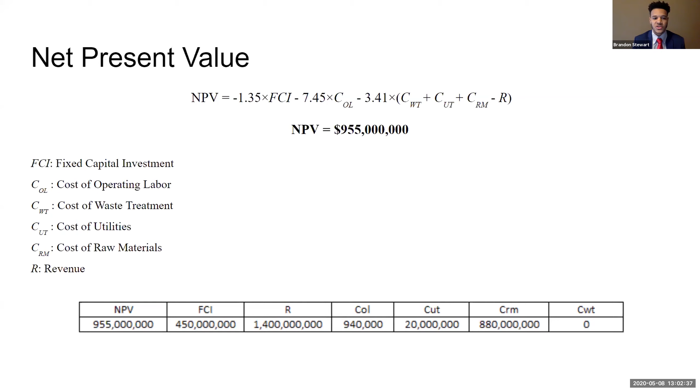Another key takeaway here is the fact that we were unable to have a VGO recycle. The reason why is because this had a negative effect on our kinetics. So instead, we're just selling that at a reduced price instead.

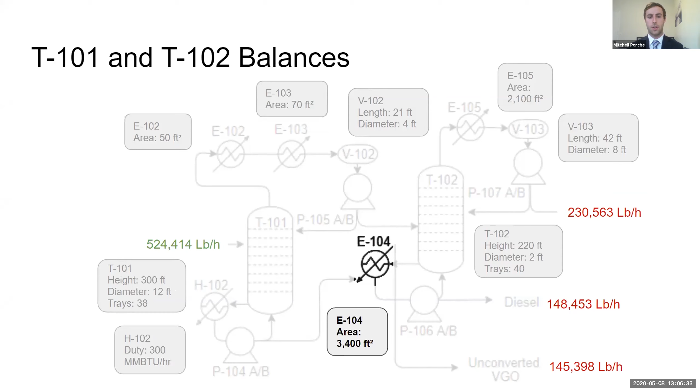It's important to note that in the literature, the reactor was held at a pressure of 2200 PSI, so we also applied this to our reactor. After reactor optimization, we determined that the optimal temperature and residence time for our kinetics were 824 degrees Fahrenheit and an LHSV of 0.9 hours, about 55 minutes.

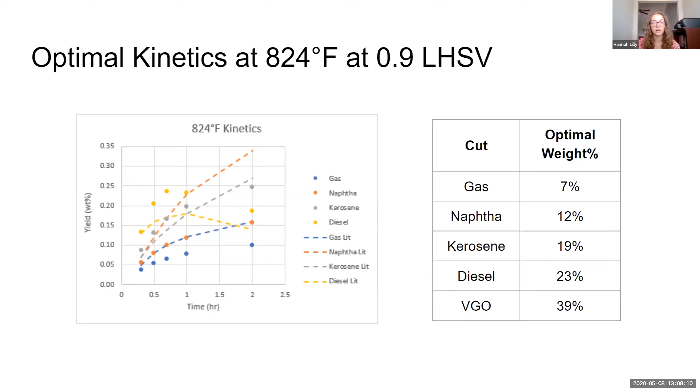Like Mitchell mentioned earlier, we're not able to recycle our VGO due to the negative effect that it had on our kinetics, so that will be sold, which we'll discuss later.

So now we'll talk about the optimizations performed with our system. Our first optimization is the reactor optimization. The reactor optimization had the biggest impact on the net present value.

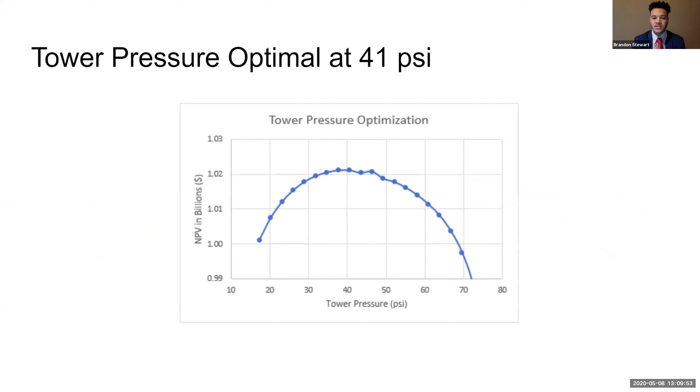We did not optimize tower 102 due to the fact of lack of convergence, and as a result of the lack of net present value effect, we thought that we could just move forward with our simulation without optimizing that one.

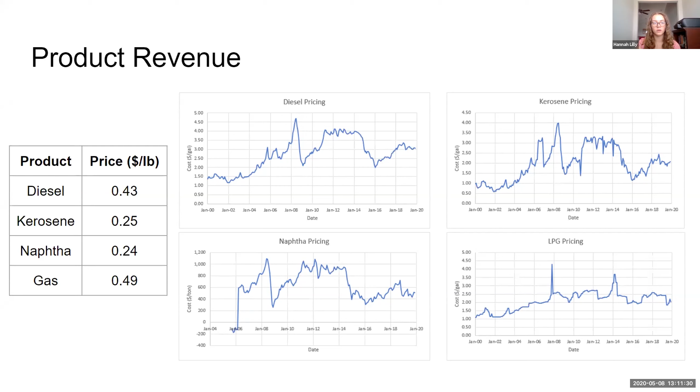Specifically for our simulation, we considered data from January of 2016 until December of 2019. These are the past 4 years of data, and a pretty good average of the pricing over the past 20 years. These graphs show price per volume. We have our products' price per pound in the table on the left, and you can see that our gas is our most profitable per pound at 49 cents, with diesel not far behind it.

So our total raw material costs are about $880 million, with most of this being comprised from the VGO. That's due to the fact that we're sending in more VGO from the VGO to hydrogen ratio, and we're also able to recycle hydrogen while we aren't recycling our VGO.

We'll be making about $1.37 billion from the revenue of our products. It's important to note here that we'll be selling our 4 products that we've mentioned earlier, as well as our unconverted VGO and the excess hydrogen that weren't able to be recycled fully. You can see here that diesel is our most profitable cut at 39% of our total revenue.

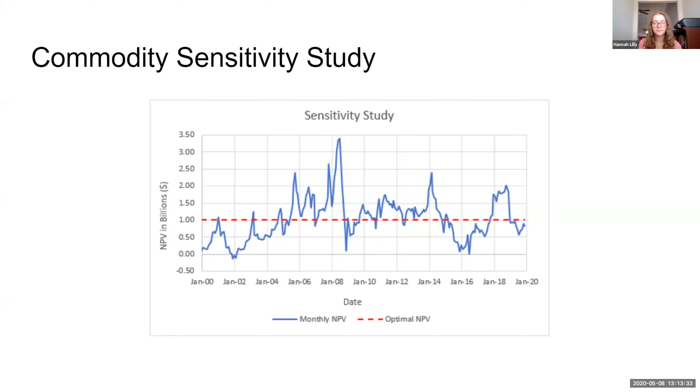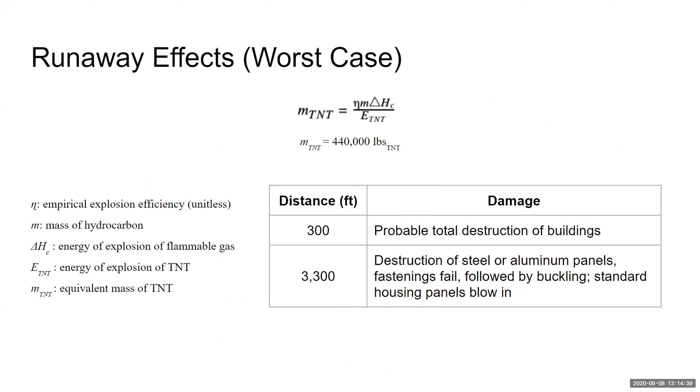It also takes into account the effect of a runaway reaction with the worst case scenario. Using this equation, we were able to calculate the explosion in pounds of TNT. So if we were to have a runaway reaction, the worst case would be equivalent to 440,000 pounds of TNT. At 300 feet, the damage would probably be probable total destruction of buildings. At 3,300 feet, you would have destruction of steel or aluminum panels. Fastenings will fail, followed by buckling, and the standard housing panels will blow in as well.

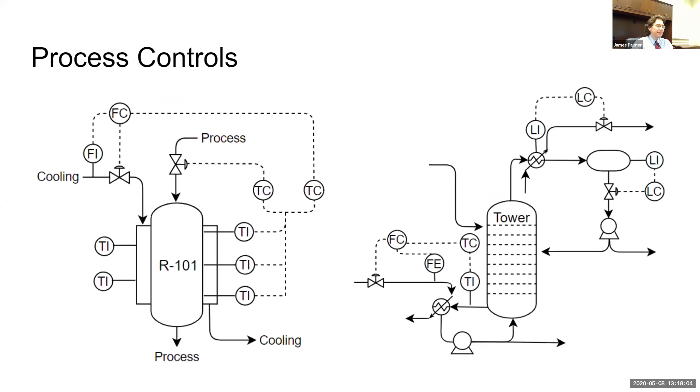On the hydrogen, what were you doing with the excess that wasn't able to be recycled? Okay, I was just stating that we were able to recycle about 43,000 pounds of hydrogen. That's how much was going through the loop. Because of the recycle convergence, I think we were only able to close off about 90% of that recycle loop, so that's why we were losing about 10,000 pounds.

But what, I mean, were you selling the 10,000 or what was happening to it? Yes sir, we sold that 10,000. That was like 1% of our revenue, which we sold at about 75% of the fresh feed cost of hydrogen.

They're asking, was there any purity requirement of the hydrogen? Yeah, so our hydrogen was purified to 99.9 mole percent. We can ensure that we weren't flashing off our products into that recycle. So we have that, but realistically, we would actually have to treat the hydrogen that's leaving before we could sell it, which is why we had to downgrade in the price.

Is there any change that you would make to the system depending on variation of your feedstock pricing or product pricing? I think depending on product prices, if we had considered a different set of years, or if products change a lot in the future, we might consider running at a different temperature and time in our reactor to be able to make the most profitable product. Diesel was one of our most profitable, so we made a lot of diesel. But realistically, if gas were our most profitable, or kerosene or something like that, we would skew our temperature and LHSV in order to have that be what we're making the most of.

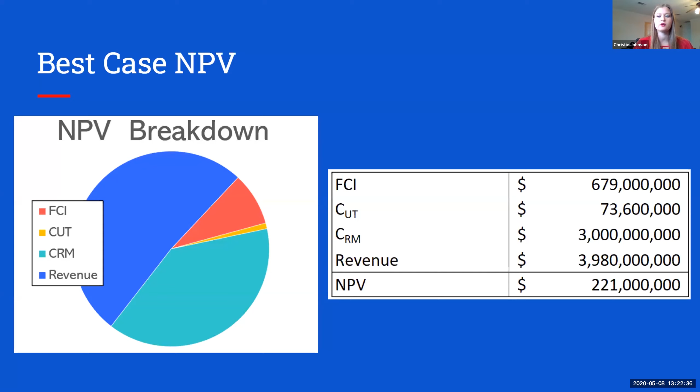So now I'm going to go a little bit more into some of the optimizations that were completed on our system. The first and probably most important was the reactor optimization, because if we weren't operating at the correct space time and temperature, then we wouldn't be maximizing our profit from converting to our products.

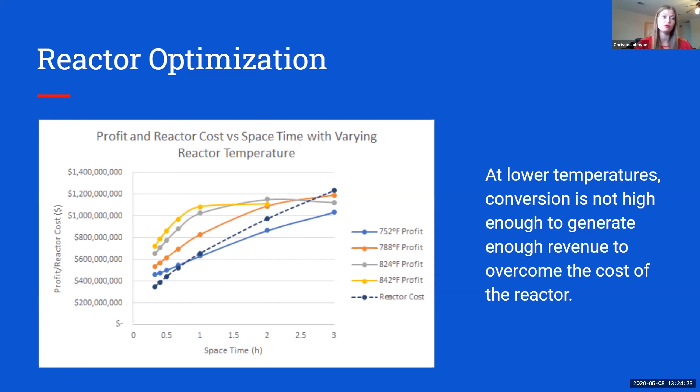The next optimization we performed on our system was on our towers. The first thing we did was try to figure out what number of stages we needed for our towers and what the optimal feed tray location would be. We tested 3 different feed tray locations: the bottom quarter of the tower, the top quarter of the tower, and the middle of the tower, for all 4 of our towers.

Another thing we optimized with our towers was the pressure. Due to time constraints, we weren't able to optimize the pressure of each tower individually, which would be another step in our process as we continue to move on with this. But we did optimize the pressure of the system overall, and found that our towers operated best at a vacuum of 10 psia, and this helped impact our NPV by around another $2 million.

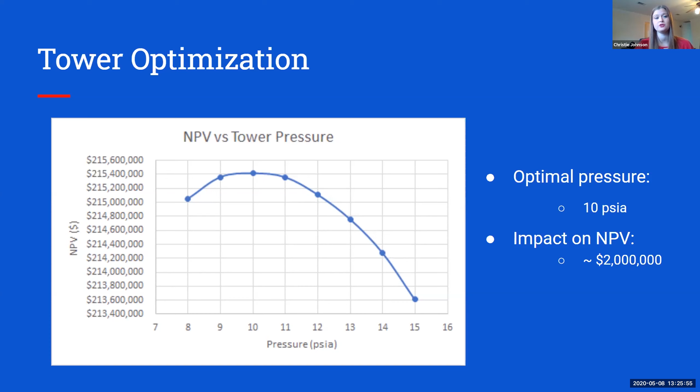We also optimized the flash drum that we used to separate out the unreacted hydrogen after the reactor so that we could recycle it. Optimizing the flash drum, we found that a pressure of around 3,000 psia and a temperature of 95 degrees Fahrenheit was the optimal conditions, and kept the hydrogen mostly pure, with some propane leaking into the hydrogen, but we continued to monitor our kinetics, and that didn't seem to affect how our reactions were proceeding.

We also performed a topology optimization. At the beginning of this project, we also considered the fractionator configuration, in which you have a larger column that then separates out the cut fractions that are then further separated using daughter columns. However, this posed many challenges for us, especially when it came to convergence in ChemCAD, as well as the specifications that needed to be set on the fractionator. We were able to run preliminary economic runs on this configuration, and we saw that it did not yield an optimum like our traditional towers, just due to the little amount of flow we were able to pull off from the side streams.

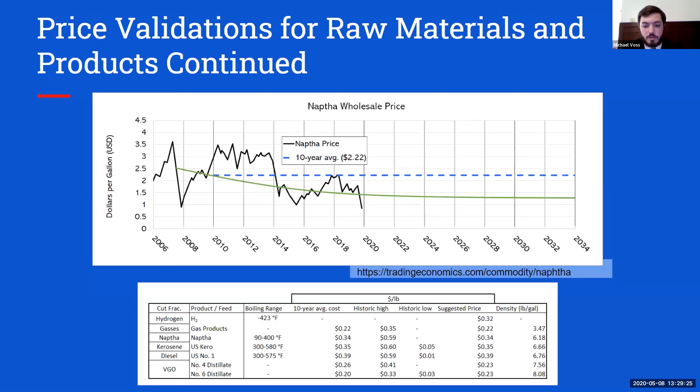This was actually obtained from tradingeconomics.com, a slightly different website with a slightly different time scope. However, we were able to perform the same technique on modeling the prices out and obtain the same values. Finally, at the bottom here you can see our pricing table, which includes all of our cut fractions as well as our hydrogen and VGO feeds, with their 10-year average costs, some historic highs and lows, and finally a suggested price that we used in our system.

We were also able to perform a theoretical profit margin to see if our system could not only be profitable, but also give us an indication as to where our optimal may lie. However, it needs to be noted that this only considers the revenue gained from selling our cut fractions, as well as the raw material cost. It doesn't consider the other things that go into our net present value, such as the FCI, utilities, and other operating costs. And these do track well with what our reactor optimization yielded.

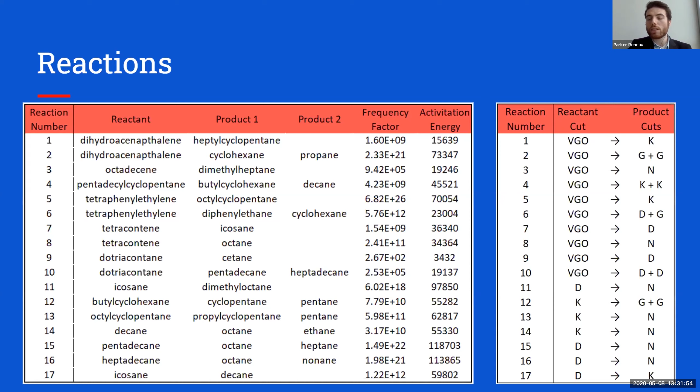And these are the reactions that we decided on. The first 10 reactions are our VGO feedstock going to our individual cut fractions. The latter reactions, 11 through 17, are the degradation reactions that we needed in order to best represent the curvature that you will see in our kinetics for diesel and kerosene at the higher temperatures. As you can see in the leftmost chart, these are the frequency factor and activation energies that we decided on after doing our kinetic validation.

Essentially the way our product justification was performed was by taking a baseline of 10 components and passing those through our simulation to see where the boiling points would lie and what range of temperatures our product would boil at. Then we were able to back down those number of components from 2 and start going back up all the way to 5. We were able to track the curvature of those lines and compare them to our base case. For most of our cut fractions, we were able to use either 3 or 4 components, and this was just due to the shape of those lines overall and how closely they fitted to our base.

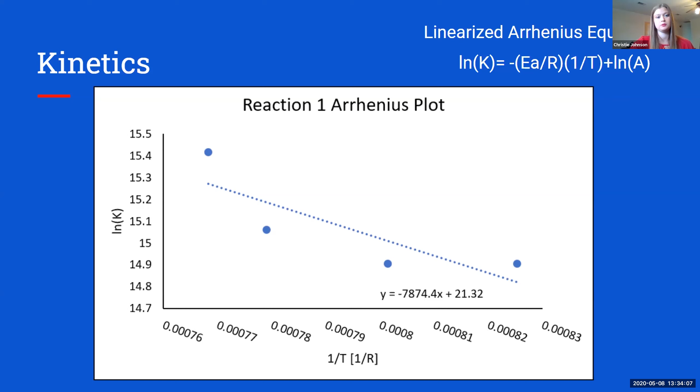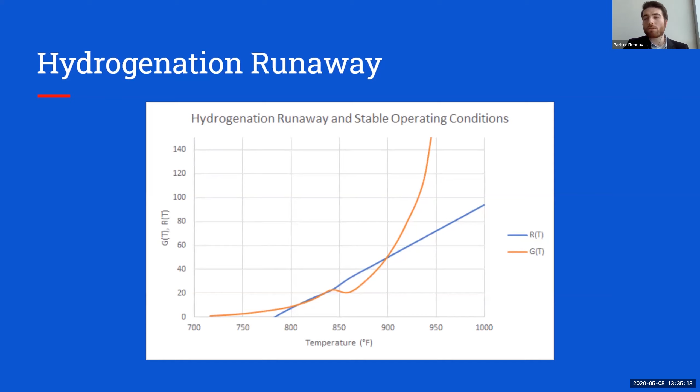So now Parker's going to talk a little bit more about our safety and environmental considerations. One of the main hazardous issues with this system specifically is the chance of hydrogenation runaway due to the hydrogenation reactions being exothermic. As you can see on this heat generated versus heat removed graph, once you reach around 900 up to 1,000, it does pose a problem because your generated heat outweighs your removed heat, and so your temperature would just essentially continue to increase within your reactor, and it could lead to several issues such as an explosion if the temperature were to get too high.

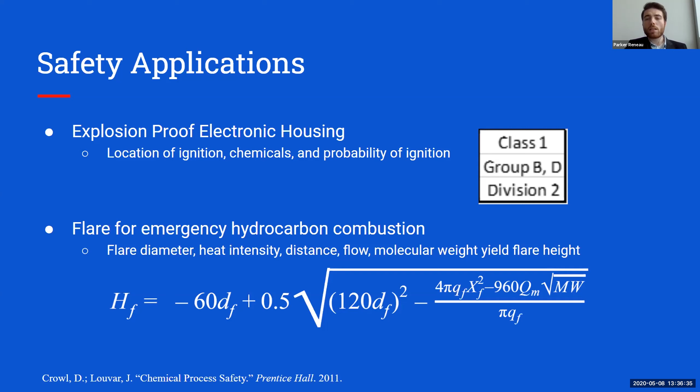Going on to the next slide, a ubiquitous thing that we would need would be pressure relief valves throughout our system due to the high pressure and temperature. For the higher temperature and pressure areas, conventional and pilot operated relief valves would probably be best on all of our vessels, because others can tend to lead to failures due to the high temperatures on the elastomer stress. For our lower temperature areas, such as the latter half of our process, a rupture disc followed up by a relief valve is pretty common in order to handle the flow as well as the corrosion.

One question: were any safety considerations taken or control schemes proposed on the feed heat interchange on the reactor?

Yeah, I can talk a little bit about that. In general, for the most part, we weren't too worried about that exchanger, primarily since the feed coming in is already fairly close to the temperature of the effluent coming out of the reactor. So any savings we would be making off of there would again just be kind of like a heat recycle almost. Since we had already accounted for the material of construction needed for the reactor as well as that heat exchanger, we hadn't considered anything outside of the normal standard safety procedures.

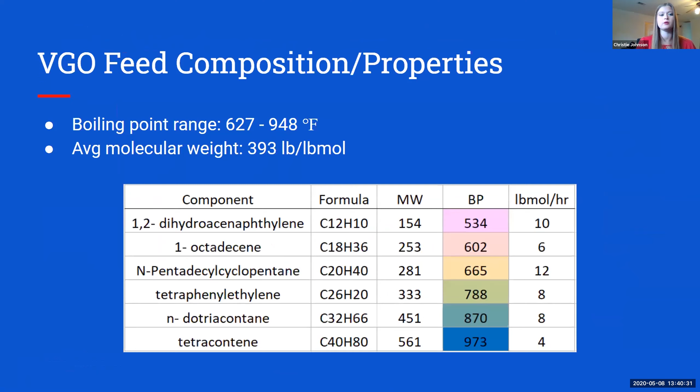So someone's asking, you know, you've got a light feedstock, maybe talk about the justification on that. Yeah, so if you could go back to the slide with our feed. Some of the components that went into the feed would have been by themselves considered in a different cut because they were lighter or had a lower boiling point. But the goal there was to be able to match that distillation curve so that it would simulate accurately. In order to make it match those low and high boiling points on the distillation curve, we had to include some components that by themselves would boil lower. But you can see the boiling point range shown on this slide is for our feedstock as a whole. So even though it did have some lighter components in it, it didn't start boiling actually until it got to that lower boiling point of VGO.

Did you have any regional pricing on products? Could you figure out where the best place to site this would be? Just in general, from all of our components, I know the EIA.gov website cited very little regional data explicitly for different locations and different components. We didn't exactly go into that since we wanted to determine a base case for our system. We didn't want to specify that our system would only make money if we were buying this one specific kind of crude oil from this one location, since we're in such a volatile time right now where we didn't want to lock ourselves into any situation that we wouldn't be able to continue to make profit. How much a day or a year did your unit make?

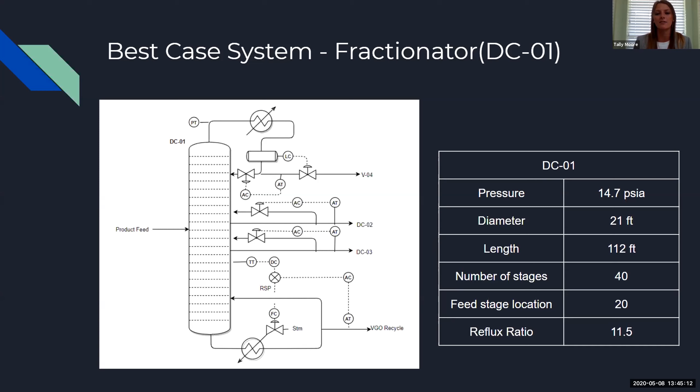The schematic for both of the daughter columns coming off of the fractionator is the same. For distillation column 2, the top distillation column coming off of the fractionator, it had a pressure of 14.7 with a diameter of 10 feet, a length of 48 feet. It contains 16 stages with the feed stage location at 11, while distillation column 3, the bottom column coming off of the fractionator, contained the same pressure with an 8-foot diameter and a length of 42 feet. It had 14 stages, and the feed stage location was at stage 6.

And then we've got both our separators, our high and low pressure separator. The high pressure separator was at 1700 PSIG and 135 degrees Fahrenheit, with a diameter of 13.8 feet and a length of 41.4 feet. The low pressure separator was at 14.7 PSIA and 100 degrees Fahrenheit, with a length of 27.6 feet and a diameter of 9.2 feet.

And we'll go into how we got the specs of each of these based on optimizations later on.

On the left, you can see a breakdown of our NPV, including the revenue, materials, equipment, and utilities. And on the right, we have a pie chart breaking down our revenue so you can see how it contained each product.

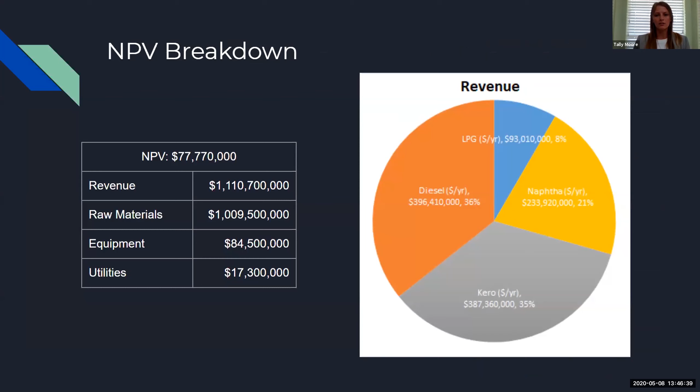First, we had to justify our cut fractions based on the atmospheric equivalent boiling point and the molar mass of the paraffins, using all paraffins for simplicity. We split the heavy VGO range to justify the VGO boiling point and molecular weight, then did the same thing for diesel with the higher end of the middle distillates range, and the same for kerosene with the lower range. Then we split the middle for the naphtha range to justify the naphtha cut fraction.

We put together this table showing a breakdown of the cut fractions, color-coded into each cut fraction. You can see the molecular weight of each cut fraction, as well as for each component, the number of carbons they contain, the name, and the boiling point of each one.

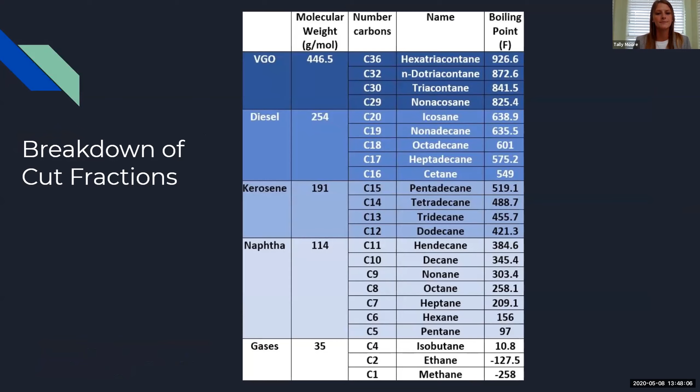For the middle 2 temperatures, 788 behaves pretty much the same as the previous 2 temperatures, but at 806 the naphtha starts to increase as you increase the temperature. Again, pretty good fits for both. For the sum of squares error, 788 is about 12% and 806 is about 6%.

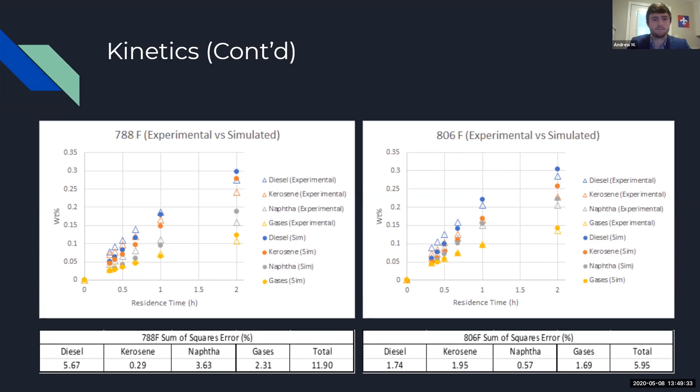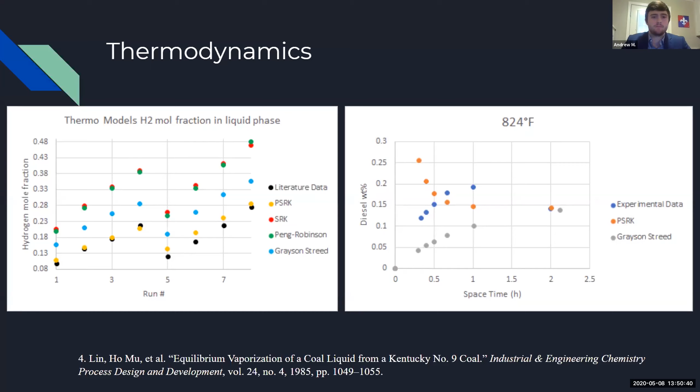But then we went and did the kinetics, and it inverted all of the values for all the cut fractions and temperatures, as you can see there on the right. So we had to use Grayson-Streed instead, because it gave us better fits on the kinetics and gave us the right behavior as well.

That high cost is also due to the pressure and temperature. Some other high costing things included are some of our reboilers.

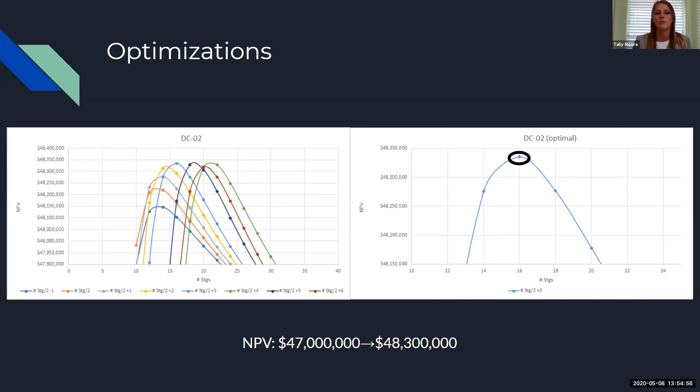For a fractionator, we coupled the pressure—basically the feed pressure of the fractionator—and the reflux ratio. We found that as you decrease the pressure, the NPV increases. So we got it down to 14.7 PSI, or atmospheric, with a reflux ratio of 11.5. This brought our NPV up by 20 million, from about 49 million to 69 million.

For the high pressure separator, we coupled the pressure and the temperature. After 135 degrees, the optimal pressure was higher than the reactor pressure, so we couldn't go above 135 degrees. We decided to cap it at 135 and found our optimal pressure to be about 1700 PSI. That brought our NPV from 69 million to 77.2 million.

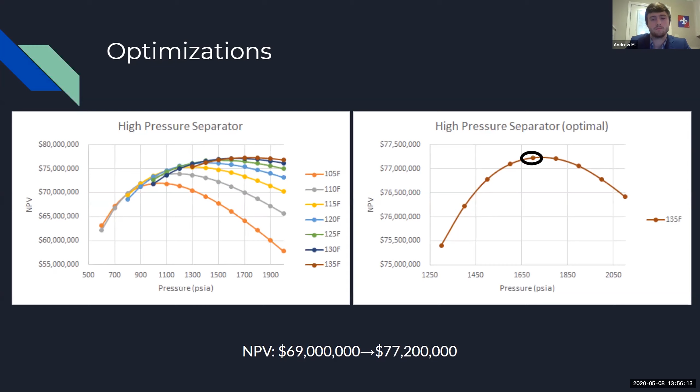That temperature is 883 degrees. So anything after that, you would need more flow rate of quenched hydrogen into the system to cool it down and prevent a runaway reaction.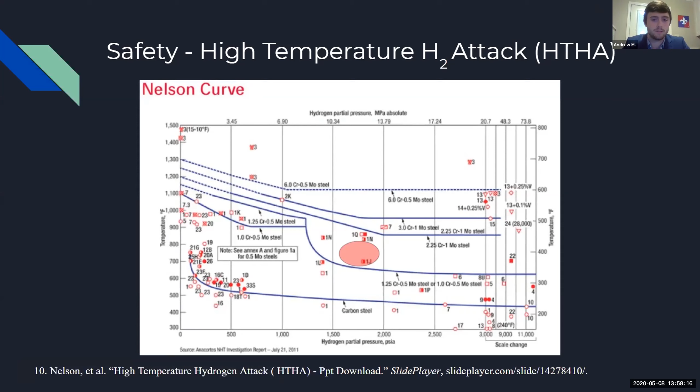And those are our references. Any questions? We've got a couple of questions.

One question first: you had a reflux ratio of 11.5 for your fractionator. Could you show me what your utilities were for that, both the reboiler and the condenser? So it's going to be condenser 1 and reboiler 1. So 3 million and 6 million? That'd be—oh, condenser 1, 246?

Wow, that seems low. So that's cooling water, I guess, right? Yes, sir, correct. And then what's the utility on reboiler 1? Tally, what did we decide to use? I believe for that reboiler we did it as a fired heater. And let's say your heater was 3 million. So I'm just surprised that a reflux ratio of 11 was the optimal there.

Another question: the residence time appears to continue past the chosen optimal. Why was the optimization stopped there? The reasoning behind that is because that was actually when our simulation stopped—the data from our article stopped, and we didn't feel like we had the ability to go past the residence times and temperatures we were basing our simulation on, so we didn't think that would accurately depict the profit and NPV.

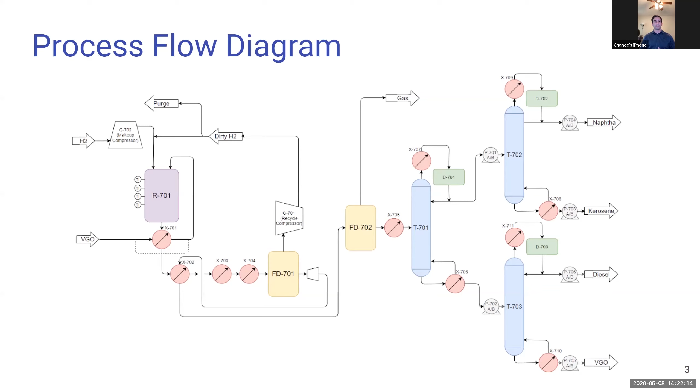That stream just enters our series of distillation columns to be separated out. An important thing to note is that the entire process before that second flash drum is kept at about 150 bar. This makes it so our recycle compressor can be significantly smaller, since it's not having to bring it back up from atmospheric pressure down to 150 bar. It's only that makeup hydrogen compressor that's having to do any serious compressing work.

Now for the safety considerations. Since we did have that heat integration with the VGO feed, we wanted to add a bypass line around it, so we wouldn't risk having a runaway reaction. By utilizing a bypass, if the reactor starts to overheat, we could bypass the VGO around that exchanger and deliver relatively cool VGO feed to the reactor bed, to quench that reaction before it starts to run away.

In addition, we'd also like to add a lattice of temperature indicators around the reactor bed, so we could more closely monitor how the reaction's going and monitor any hotspots that might be occurring. We'd even be able to tell if there's a cold spot in the reactor bed, and troubleshoot to determine if it was channeling or coking possibly forming.

For safety considerations, we wanted to look at the possibility of both hydrogen embrittlement and high temperature hydrogen attack. It seemed like high temperature hydrogen attack was the only real threat to our unit. Shown on the graph on the right, the red line depicts the operating range of our unit. Depending on what temperature we use for the reactor, it could be anywhere on that line, and that line is well above the minimum that carbon steel is rated for. So moving forward, we decided to use stainless steel for both our reactor and the first heat exchanger right after the reactor, so we don't have any high temperature hydrogen attack occurring.

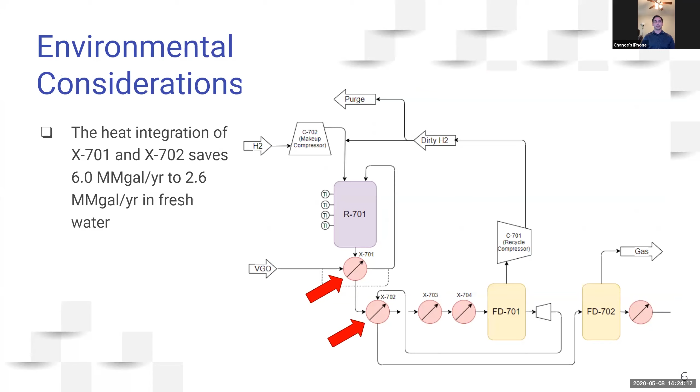Right now we have our feed components, which we chose based off of their carbon numbers and their boiling points. Each component making up the VGO has their boiling points listed here from the lowest to the highest. It was also found that VGO typically consists of about 27.4% aromatic compounds and 72.6% non-aromatics.

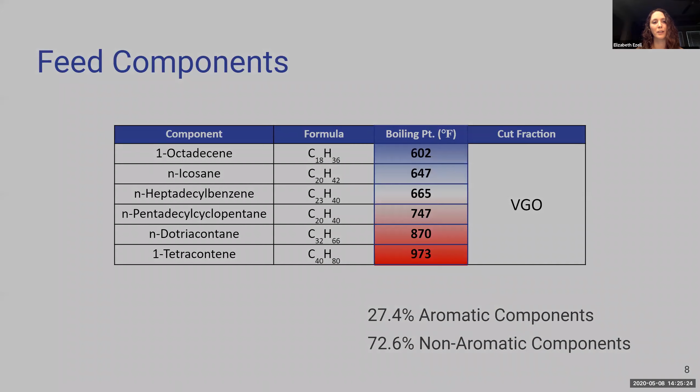Next we have our product components. These are also organized from the lowest boiling point to the highest. We had about 4 components per cut fraction, also chosen based off of their carbon numbers and boiling points.

Now we have our graphs of our kinetic model versus our reference data. The points on the graph represent our reference data, and the dashed lines represent our model. We modeled 4 different temperatures and 4 different residence times. The residence times were about 30 minutes, 40 minutes, 1 hour, and 2 hours. The temperatures were 752, 788, 824, and 842 degrees Fahrenheit.

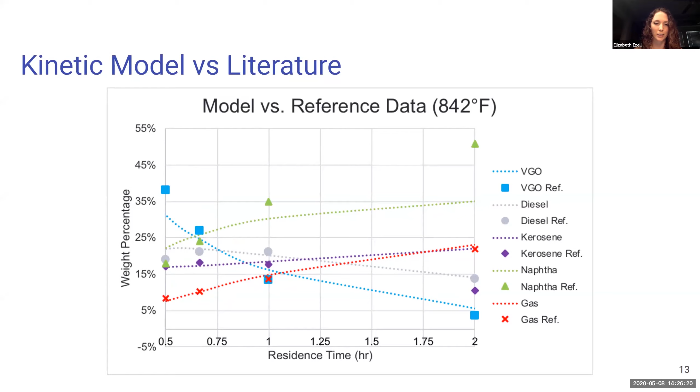Next, I'm going to be talking about unit costing and specification.

First, we can talk about reactor and flash drums. Our reactor was quite huge with a diameter of 28 feet, height of 238 feet, with a volume of 143,000 cubic feet. The total CBM of our reactor was $412 million. The material of construction for the reactor was stainless steel to avoid hydrogen attack at higher temperature.

Our first flash drum was quite expensive with a CBM of $4.5 million. The second flash drum was less expensive because of the less flow rate going into it, with a CBM of $231,000. The material of construction for both flash drums was carbon steel.

Next we got compressor specification. We had two compressors, as Chance mentioned earlier, one for hydrogen recycle, one for hydrogen inlet feed stream. We got the efficiency and power straight out of ChemCAD, and the total compressor CBM was around $3.7 million.

Next, I'm going to be talking about tower and surge tanks. We had a total of 3 towers in our system, with tower 702 being the most expensive of all, with a CBM of $7.2 million. The total number of actual trays were 62, with a diameter of 6 meters and height of 41 meters.

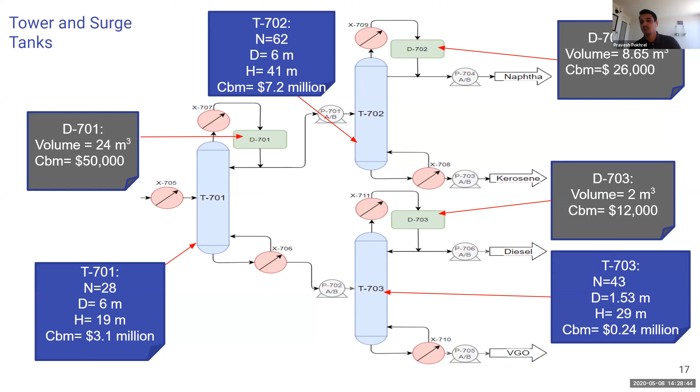Our first reflux drum for the first tower was 24 meters cubed in volume, whereas the last one was just 2 meters cubed because of the very low flow rate going into the system.

We had a total of 10 heat exchangers in our system, with heat exchanger 701 and 702 participating in heat integration, as Chance mentioned earlier. We cool down the reactor effluent stream using an inlet VGO flow rate, which was further cooled down by the stream coming out of the first flash drum down to around 397 degrees Fahrenheit, further cooled down by using cooling water in heat exchanger 703 to 150 degrees Fahrenheit. Then we use heat exchanger 704 to cool it down to 70 degrees Fahrenheit using moderately low refrigerated water.

These are the heat exchangers we used in our tower, with a reboiler and condenser in each of them to heat any process stream more than 500 degrees Fahrenheit. We use a natural gas fired furnace with some kind of heat exchanger fluid like molten salt, which doesn't crack down at higher temperature. To cool down some process streams more than 300 Fahrenheit, we use cooling water with some kind of heat exchanger fluid like Dowtherm. In total, we have a total heat exchanger CBM of around $1.28 million.

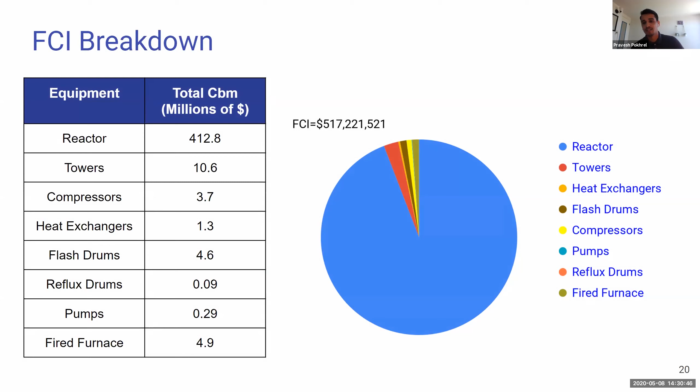Next, we're going to be talking about the optimization. The first optimization we did was reactor optimization, where we used reactor residence time and temperature coupled together to find the optimal NPV value. Our optimal NPV value was around 2 hours of residence time at 824 degrees Fahrenheit.

It was the second highest temperature where we got our optimal NPV. Although we validated our kinetics for up to 2 hours, we didn't see any dip in our graph. So we went ahead and did the calculation for 2.5 hours residence time, where we actually saw the NPV going down, keeping our optimal point at 824 degrees Fahrenheit at 2 hours.

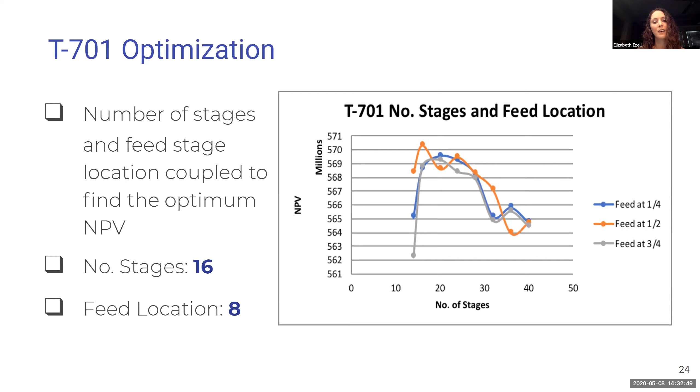T702 was our tower that separated our naphtha and kerosene. We performed the same optimization and found that the optimal number of stages was 36 stages with the feed halfway at the 18th stage.

T703 was our last tower that separated our VGO and diesel. It didn't have much of an effect on our NPV, only about $200,000. The optimal number of stages was 24 stages with the feed located 3/4 of the way at the 18th stage.

Now I want to cover some of the topology optimizations we made over the course of this quarter. This is one of the more recent ones, about a week ago. Our NPV was at $430 million. The biggest difference between this topology and our current one was that we had 4 distillation columns in this one. You can see that 4th distillation column separates out the naphtha and the gas. Instead of having that relatively incompressible gas stream go through all 3 of these columns, we instead decided to add a second flash drum before Tower 1.

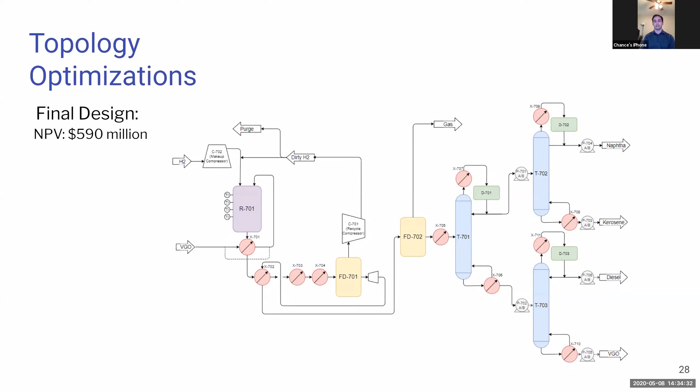We're able to remove that gas stream out, which eliminated a distillation column and also reduced the size of our distillation columns. This is showing our current topology, at $590 million — about a $160 million increase. We did that by removing that 4th distillation column, adding a flash drum, as well as some other smaller optimizations.

Now for the commodity costing, explaining how we got the pricing of our streams. First is VGO. We found it using EIA.gov, taking a 10-year average from February 2010 to February 2020 and plotting that out, which gave us the price in dollars per gallon. We also needed to convert it to dollars per pound, so we divided the price by the density of water as well as the specific gravity of the VGO, giving us a price of $0.214 per pound of VGO.

Hydrogen was a little different. We weren't able to find any direct listings for hydrogen from EIA.gov. However, on refinerlink.com we found an article stating that if you have a steam methane reformer in your refinery, or access to one, you can get hydrogen typically around $1.50 to $3 per 1,000 standard cubic feet. We decided to pick a price in the middle of that range: $2.25 per 1,000 standard cubic feet. We then converted that to dollars per pound to get a total cost of $0.432 per pound of hydrogen.

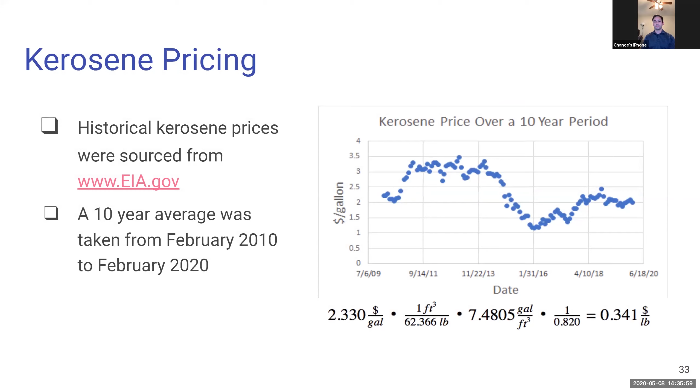Diesel pricing was the exact same as VGO. We took the 10-year average from EIA.gov and found it to be $0.324 per pound. Same thing with kerosene: we took the 10-year average, and the pricing was $0.341 per pound.

Naphtha was a little more challenging since EIA didn't have it listed, so we found it on tradingeconomics.com, where it was listed in dollars per ton. We took the 10-year average and found a cost of about $560 to $650 per metric ton. We converted that to dollars per pound and found a total price of $0.254 to $0.295 per pound.

And then finally there's the gas pricing. We were also able to find this from EIA.gov, and we found it to be about $0.22 per pound for gas.

All right, so now let's open up the floor for questions.

We've got a question about whether you're aware of any issues with impurities getting into the hydrogen recycle impacting your system. Is it about getting it to converge, or too much hydrogen accumulating in the recycle? Or are you asking about other components that could be in there that might affect the chemistry or impact the reactor in terms of conversion?

On your cooling water, you had two heat exchangers you were cooling, and you mentioned cooling water or Dowtherm. I'm assuming you're running Dowtherm through the heat exchanger shown, then calculating the removal cost based on cooling water. If so, you'd need to size two exchangers, since one has the Dowtherm going through it as oil-to-oil heat transfer, and then you'd need another exchanger for oil-to-water. Did you consider that you needed two heat exchangers there?

What I did was go back to the book and follow one of the process units that showed a schematic diagram of how they cool down temperatures at higher levels. They showed using some kind of Dowtherm fluid, and then using cooling water to cool the Dowtherm. That's a good point to consider for the future.

Yeah, because you've got to send the Dowtherm through something, right? It's got to go through a heat exchanger. So you need to size and cost out that second heat exchanger if you're going to do that.

Your reactor size was 28 feet in diameter, 238 feet tall. Did you look at breaking it up into multiples or anything? Was that more expensive, or did you try that? No, we didn't explore breaking into multiple reactors.

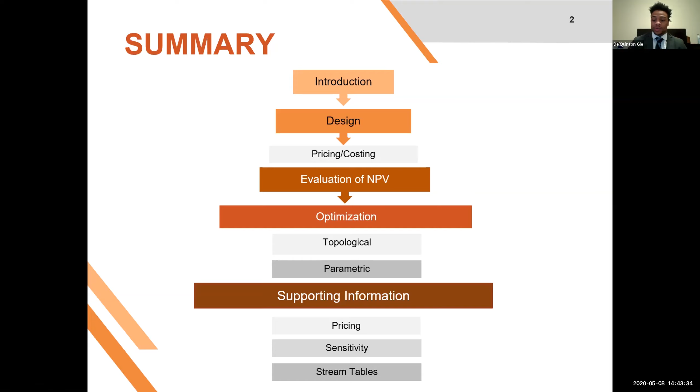So we're gonna just give a quick summary of our report. We're gonna go over the introduction, some design for our hydrocracker system. We're gonna go through an evaluation of our NPV, some of the optimizations that we've done, as well as give some supporting information to the audience on how we got to the numbers that we got to.

So just an introduction before we get into everything, some of the quick numbers. We had a net present value of 620 million. And as you can see, we had a revenue of about 4.1 billion, raw material cost us 3.1, and we'll go deeper into these numbers as the presentation goes on.

So here's the overall design. As you can see, we have one single reactor, a hydrogen recycle, a high pressure separator, a low pressure separator, as well as 4 distillation columns.

If we just take a look at the reactor section, we have our reactor product stream at over 600,000 pounds an hour, a mix of both unreacted VGO as well as the products that we've made. That goes into our first high pressure separator, which helps us recover most of our hydrogen. Then we purge off mostly butane that was unrecovered in that hydrogen stream. And then we send that mix to another, yet again, a low pressure separator, which goes on to our towers.

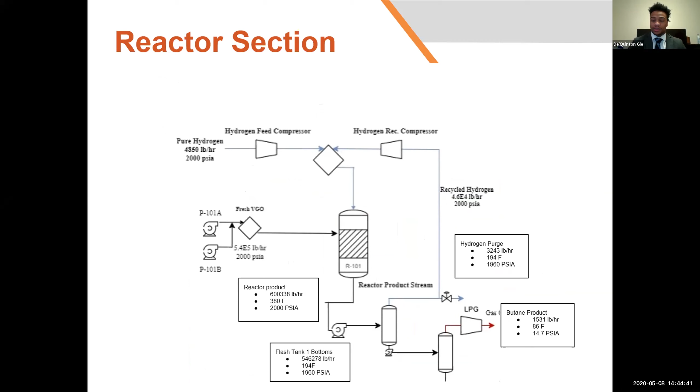Okay, so next we have our first 2 towers. Our first tower is separating our middle cuts, with LPG and naphtha going up to the distillate product, and our kerosene, diesel, and unconverted VGO going out the bottoms of that first tower. Going to the second tower, that's where we separate our LPG from our naphtha.

Next, the third tower takes the bottom product of our first tower, which separates our kerosene and diesel from the unconverted VGO, which should be sold as resid. And our fourth tower separates our kerosene from our diesel.

And this is just a broad overview of our equipment. We have a 53,000 cubic foot kinetic reactor with a zeolite catalyst, an 8,500 cubic foot separator, that's our high pressure separator, an 1,800 cubic foot separator, which is our low pressure separator, 4 distillation columns, 4 compressors, and 5 pumps.

And this is our reactor sizing. So initially we couldn't size the reactor using the equation in the book due to the high volume and high pressure. So we used an equation that Dr. Palmer provided, and from it found our effective diameter and height of the reactor. This equation already factors in our pressure factor of 2000 PSI.

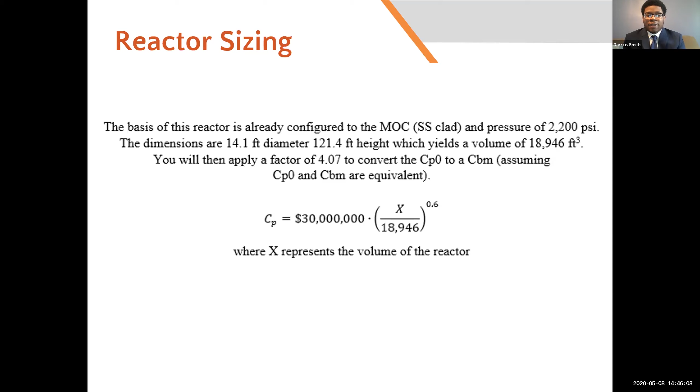Yeah, that's good. So our tower sizing was determined by first calculating the cross-sectional area of the tower. We used that cross-sectional area to determine our volume by multiplying by the number of trays and the tray spacing.

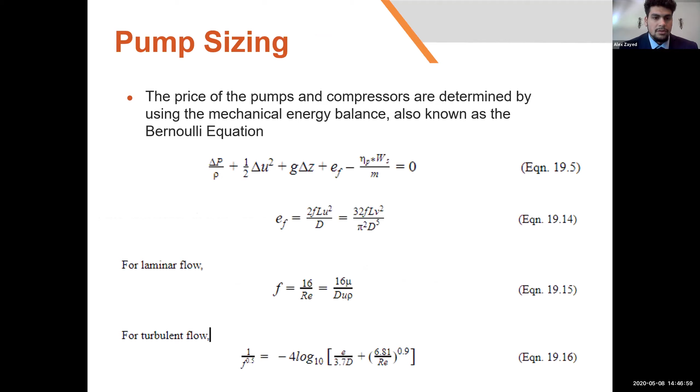For our pump sizing, we use the mechanical energy balance, also known as Bernoulli's. As you can see, we did our equations. We found the Reynolds number to determine if it was laminar or turbulent flow, and from there determined our friction factors and other variables, whether they're neglected or not.

And then our compressors, we sized using the adiabatic reversible compressor calculation.

For the fired heaters, which we use as a substitute for some of our reboilers, since we couldn't get high enough utility temperatures, we priced these by using the heat duty on our reboilers and our columns.

For our thermodynamic justification, we researched which thermodynamic models would be best for our VGO feed. We read that models such as Peng-Robinson and Grayson-Streed were suitable. However, we couldn't find thermodynamic data for Grayson-Streed, so we decided to see how Peng-Robinson behaved within the system versus some thermodynamic data we found.

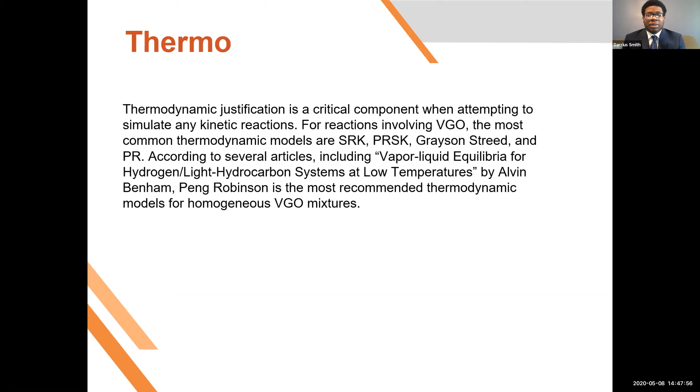Moving on to our reactions, we have 8 reactions total: 2 produce our LPGs, 2 produce kerosene, 2 produce naphtha, and 2 produce diesel products.

Here's a rundown of our kinetic values. These numbers mean more when compared to our literature data, compared at 380 degrees Celsius, or 716 Fahrenheit. We'll show how this lines up with residence times, and discuss more why we chose an hour of residence time as we get closer to our products. Our ChemCAD simulation lines up pretty closely to the literature data.

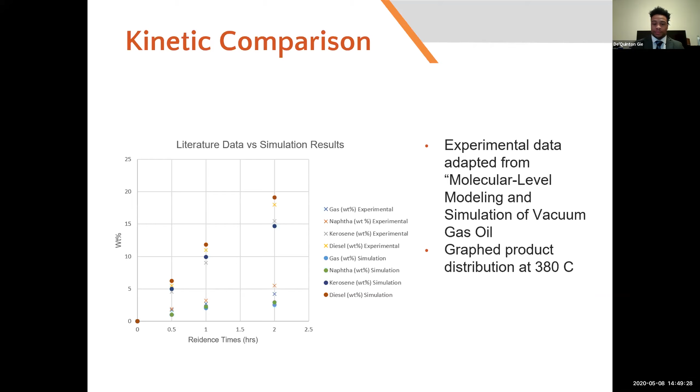Our diesel trends slightly above, and so does our kerosene, but it's about a 1% difference on each.

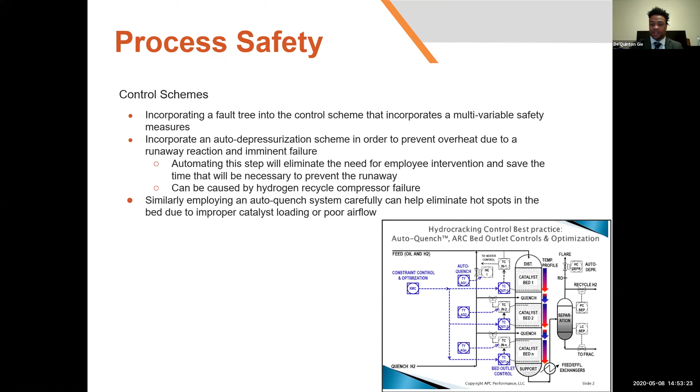Likewise, we took a look into instrumentation, and it seems pretty standard to install internal pressure gauges that will not only tip you off to a runaway reaction, but will also tip you off to a leak in the reactor.

Hydrocarbon gases pose a large fire and explosive risk if they begin to leak due to some type of corrosion through the walls of the reactor, so it's something we should definitely watch out for.

Finally, we'll cover some safety on maintenance and operation as well, just for the safety of our employees working around the reactor. There's a lot of caution when it comes to unloading the catalyst, and catalyst should be allowed to cool to 120 degrees Fahrenheit in order to prevent sulfide fires, as well as they pose an emissions hazard above that temperature due to various hydrocarbon gases and gases containing sulfur.

Then for operation, due to the presence of hydrogen and sulfur at high temperatures, corrosion is very possible. We chose to inject colder hydrogen into our reactor in order to prevent a runaway, making it less of a risk of happening.

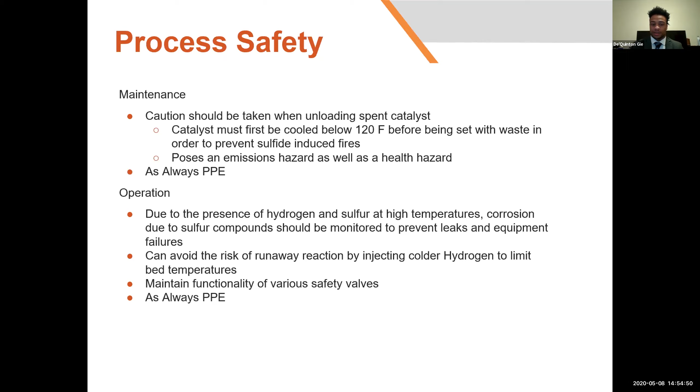Our next most expensive piece of equipment after our reactor is our second tower, which separates our LPGs from our naphthas. This tower had to be very large, not due to the amount of flow, but due to the very rigorous separation taking place. We have some residual hydrogen coming into that stream, so we couldn't have a smaller tower to separate that. Also, the volume of the tower is pretty large due to the 50 stages and the diameter of the reactor.

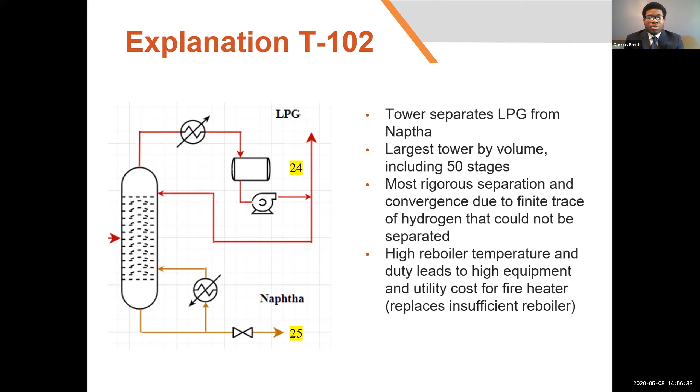This is a breakdown of the cost of that tower system, with the tower costing about 2.4 million, the trays costing about $200,000, plus the condenser and the fire heater. We had to use a fire heater because we couldn't find a utility hot enough to heat that reboiler, so we just took the duty and sized the fire heater that way. And we have a surge tank.

This is the commodity price we found for our VGO. We were buying it at 19 cents a pound, and buying hydrogen at $2.70 a pound, which gave us a raw material cost of 3.1 billion per year.

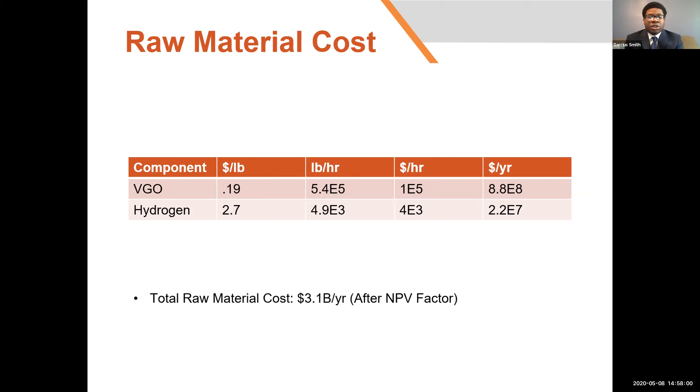So during our optimization, we're going to talk about where we thought we could best improve the system and what steps we took to improve it.

From a topological standpoint, we attempted to run a twin reactor setup. We assumed 2 reactors would be cheaper than 1 large one, and that it would help with turnaround and simpler kinetics. It didn't really have much effect on kinetics, and the reactors had similar conversion after all. But having 2 reactors resulted in a $20 million lower NPV, as well as more mass balance errors within our ChemCAD simulation. So we switched back to the 1 large reactor.

For reactor info, I'm sure many people wondered why we didn't recycle our unconverted VGO, even though we were making so much money on resid. The system had mass balance errors above a 10% recycle due to the complexity of the kinetics as you increase recycle. For every additional 10,000 to 100,000 pounds of VGO recycled, the kinetics had to be tweaked further, made more precise, and readjusted. It got to the point where it was more economical to not recycle any of it and just let it be sold as resid.

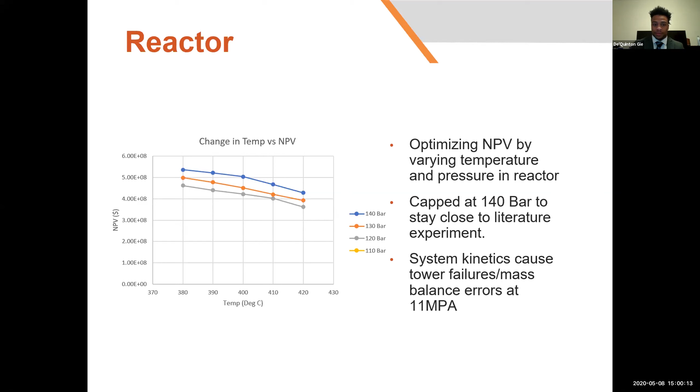Using that purity spec, we decided to see the best location for our trays and at what pressures to run them. It was shown that for the first tower at atmospheric pressure with 10 stages, the optimal feed tray was at tray 8.

Moving on to our LPG and naphtha tower, we couldn't specify the purity specs due to convergence errors in ChemCAD. So we looked at our reflux ratios and bottoms molar feed rate. There wasn't much difference, but there was an optimal point at about a reflux ratio of 3 with a bottoms molar flow rate of 60 moles per hour.

We performed the same optimization as the previous tower, looking at feed tray locations and pressure. With this tower, it was actually at a lower pressure that was most optimal, with the feed tray at tray 29 out of 40 with a pressure of 0.8 bar.

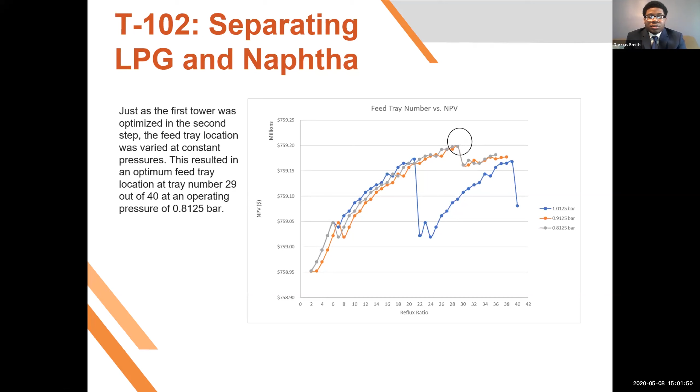For tower 3, we used a similar approach to the first tower for optimizing. We took our fraction recovery in the distillate and compared it with various fraction recoveries in our bottoms versus NPV. Our optimal value is 99.8% in the distillate and 99% in the bottoms, which makes sense because we have more valuable product in our distillate.

Same thing for tower 4, separating the kerosene from diesel. Same approach: optimize the NPV by graphing our fraction recoveries in the distillate against various bottoms component fraction recoveries. It looks a lot like the graph from tower 1. We found an optimal value of 99.9% in the distillate with a 99% bottoms fraction recovery, which also makes sense because we have more valuable product in our distillate stream.

So here's some supporting material we're going to go over. First, we did a sensitivity study on the system to show what our system was most sensitive to, and we did a 10% change on each parameter.

As you can see, the cost of raw materials really dominates the NPV of our system. A 10% increase in raw material costs would result in an almost 90% decrease in NPV, while a 10% increase in revenue would only result in a 50% increase. So our system is very raw material dependent.

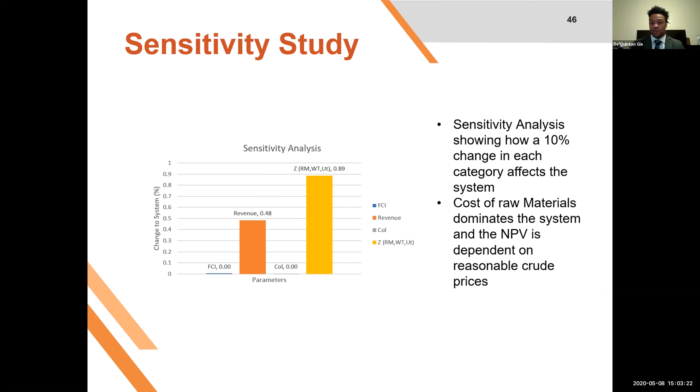In order to relate the system to similar times as we are in now, but with more well-established data, we compared our system to the oil market during the Great Recession in late 2008, early 2009. These prices were averaged from about October 2008 to April 2009. Compared to our system, our NPV went from about 620 million now to negative 160 million due to low demand.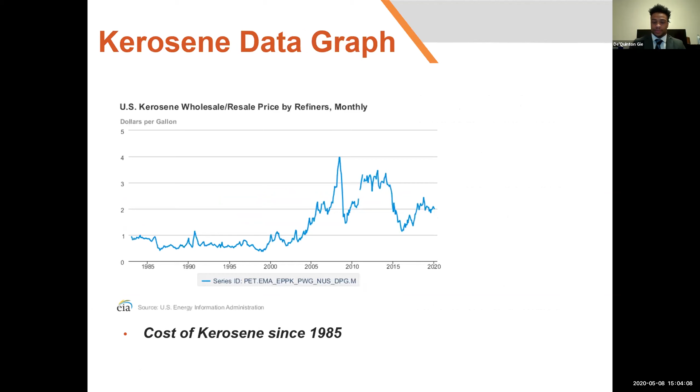Following this are the graphs containing the data we used to come up with our commodity prices, as well as stream tables from our simulation itself.

Now we'll open the floor for questions. We've got a few questions about the recycle and your VGO pricing and expectations there.

Let me see how to wrap that up together. What was the recycle rate or amount of VGO that you were seeing in the literature? Was it as low as—did they not recycle it? Were they producing as much revenue from their VGO as what you were seeing?

You're asking about the literature, correct? Yeah, I mean what I'm referring to is most of the other commercial hydrocrackers or anything else that you saw out there that was operating. Did other units typically operate at low or little or no recycle of the VGO?

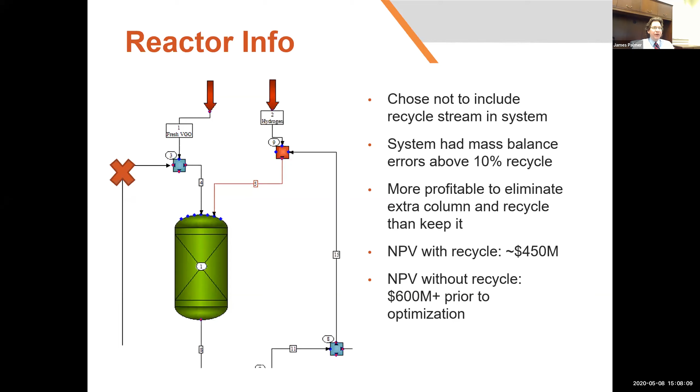I see, yes sir. So one question: is there a point if you lost your hydrogen flow—your hydrogen used to cool down the reactor—what would be the temperature where you would expect there to be a runaway? 1200.

It's right when on that unstable curve, the orange curve, it's around there. I would say that's where we found it to be. But it could possibly be lower than that because, as you can see, the heat removal rate is at a much lower temperature. So it could be at a lower temperature. Yeah, that's actually what I was getting at.

I think anything above that red line, you're relying on the cooling from the hydrogen. When I made that curve, I didn't do the heat removal curve until I made the blue and orange curve. Based on what I saw from other literature, it showed that whenever you see a second spike, that's when you're entering that runaway. So I possibly should have looked at it further once I created the heat removal rate curve and seen, okay, we can't remove any more heat after this. This is probably when we need to implement our quench. So if I were to redo it, I'd probably say around that temperature, like 800 degrees Fahrenheit.

Typically you're actively running a quench and everything, and so just to operate anyway.

Otherwise, I think at one point you said something about heat removal from the catalyst. Were you misspeaking, or did you expect to remove any energy from the catalyst? Well, like you can see in that table, DQ, it says one of the heat sinks is catalyst, but as you can see, it's a minor heat sink, so it's probably negligible. That's another reason why I didn't include it, but even if I did, I didn't have information to really calculate any heat removal from the catalyst.

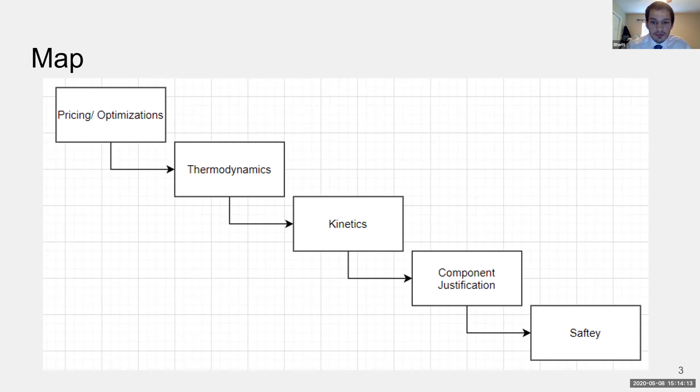So this is just a map of what I'm going to be talking about. I'm first going into my pricing and costing and my optimizations. Then I'll talk about my thermodynamics, then my kinetics, and then I'll go into my component justification and some safety features.

So this is just some of my NPV expenses broken down. As you can see, my reactor was one of my biggest expenses, about 82% of these expenses. The next highest was my utilities, which was about 12%.

Two things in the NPV that aren't shown here, since they're such a higher magnitude than everything else, are my revenue and my raw material costs. My revenue was about 4.6 billion, where my raw material costs were about negative 3.9 billion.

Next I'm going to talk about my reactor. I optimized its NPV versus the reactor residence time, and got my most optimal at 806 degrees Fahrenheit and about 0.66 residence time. So I used a 50,000 cubic foot reactor.

And it operated at a pressure of 2,263 PSI. From my initial reactor to this one, it increased my NPV by about 162 million. The overall NPV of this reactor cost me about 349 million.

Next I'm going to talk about my first distillation column. For this column, I optimized its feed tray location versus the NPV. The NPV of this tower included all the reboilers, the surge tanks, the pumps, and all the utilities that go with that, including the tower's cost and the tray cost.

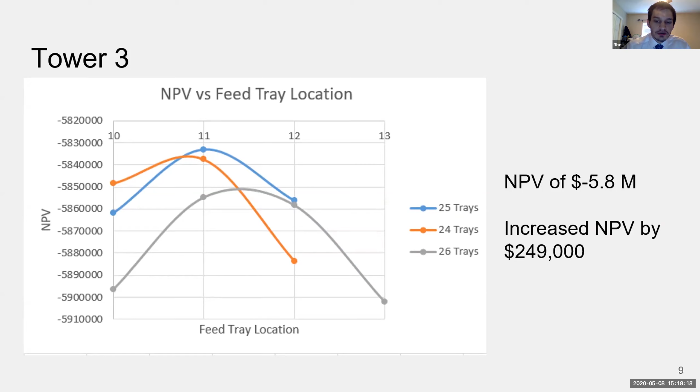Next I'm going to talk about my commodity pricing. For my propane, diesel, kerosene, and my residual oil, I priced them using EIA.gov, and I did a 5-year pricing average from January 2015 to January 2020.

For my residual oil, I got about 14 cents a pound. For my liquid petroleum gas, I got about 16 cents a pound. For my diesel, I got about 42 cents a pound. And for my kerosene, I got about 26 cents a pound.

For my VGO, I also priced it at EIA.gov, but their more recent data for VGO had a lot of missing data points. So I decided to do a 10-year average from January 2000 to January 2010, which gave me an average price of about 19 cents per pound for VGO. For naphtha, since EIA.gov didn't have it, I got it from Trading Economics and did a 5-year average, getting about 25 cents a pound. For my hydrogen, I got data from refinerlink.com and calculated it to be about 42 cents a pound.

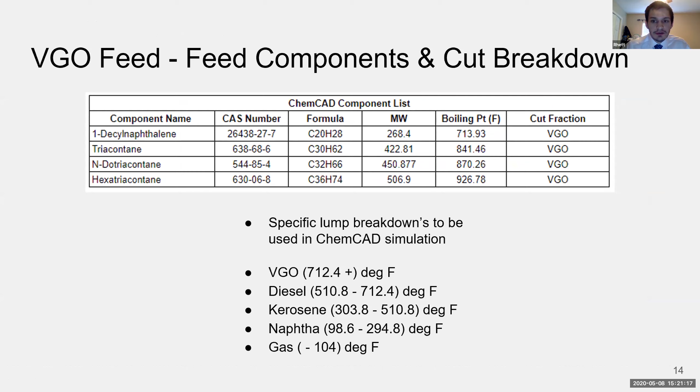Next, this is how I had my feedstock composition. I found a source that said aromatics were about 27% and the non-aromatics about 73%. So this is how I fed my VGO feed, with it being about 27% weight percentage aromatics and 73% non-aromatics.

And these are the components that I used to simulate my product. They're again sorted by boiling point, and on the side of them you can see what cut fraction they belong to.

So this is the reaction, the kinetic lump reaction model I used. As you can see, I have VGO that can break down into either kerosene, diesel, or liquid petroleum gas. Then the diesel and kerosene can break down into naphtha, and the naphtha can further break down into liquid petroleum gas.

On the left-hand side, these were the kinetic parameters that the source gave as an initial starting point to try to align my kinetics. These are just my reaction pathways that I used to simulate the reactions in the reactor. The first three are my non-aromatics, and then my last network was my aromatic network.

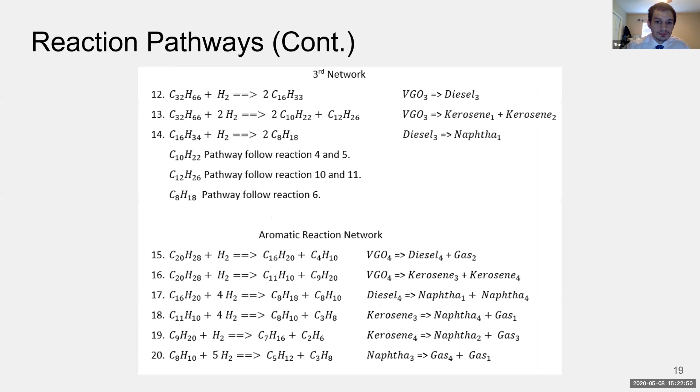This is my matching of my kinetics. I matched it at different temperatures and then used a linearized Arrhenius equation to get one set of kinetic parameters that I could use at multiple temperatures that would match pretty decently. And these are the results I got from that: this is it at 788 degrees, this is it at 806, and this is it at 824.

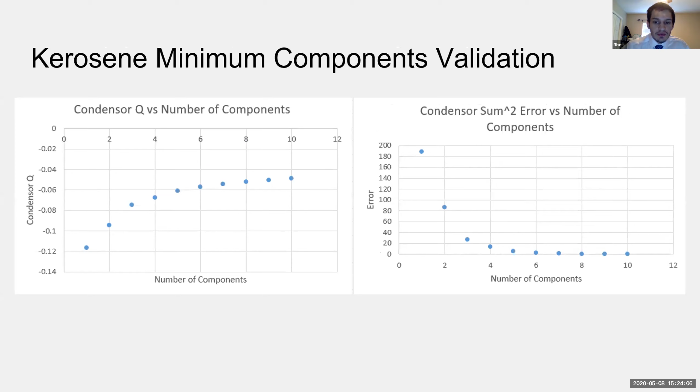Next up, I'm going to talk about how I validated the minimum components I needed to simulate this. I slowly added the components for one cut fraction into a distillation column with a high fractional recovery of about 99.9% of that cut, and saw how the duties change in the reboiler and condenser. For my feed, I found it to be about 3 or 4 needed, and I ended up going with 4. For diesel, I did the same thing and found 3 needed, but ended up going with 4 too. For kerosene, again I chose 4 as my minimum number needed. For naphtha, again I chose 4. And for gas, again I chose 4.

Next up, I'm just going to talk about some safety things. One of the biggest safety concerns is a runaway reaction and overpressurization. To counteract this, inside the reactor I would have multiple layers of multiple thermocouples. These thermocouples would be reading the rate of rise and have a higher temperature limit. If two of these thermocouples at any one of these layers would both say that it's exceeding the max temperature or exceeding the rate of rise, then it would open an on-off valve that would drain all the components in the reactor to flares.

Another thing is for pressure, it would also be reading the pressure, and if the pressure started to go too high, it would initially open a smaller valve to try to release a little bit of stuff so you don't have to completely shut down the unit. And if it continued to have a pressure issue, it would then open the bigger valve and drain the vessel completely.

My primary way to stop the runaway reactions would be a hydrogen quench, but I did not have enough time to calculate the point at which the runaway reaction would happen, so I was not able to calculate that higher temperature limit that those thermocouples would need to be reading. Other than that, any questions?

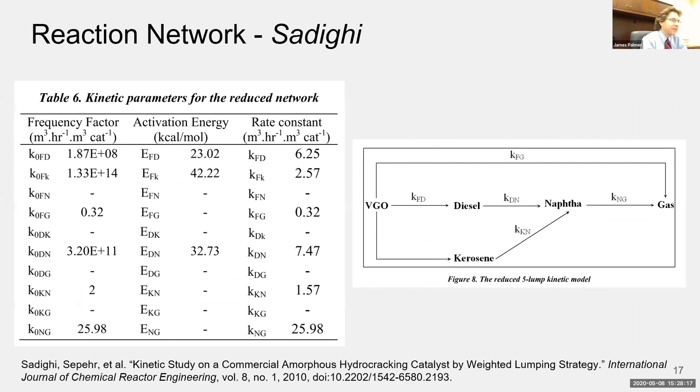I would have expected that the higher temperatures would have had a bigger increase in net present value, but I also had a really high pressure. I wasn't able to optimize the pressure because I didn't have time to, so I feel like with a more optimal pressure, it would have shown a bigger gap between them.

One question: why was your raw material cost negative? I was just saying negative 3.9, meaning it cost me 3.9 billion. You were purchasing it, right? Yes, sir.

Were you concerned about low temperature embrittlement? I was, but I didn't have time to look into it. I know the reaction is exothermic, so it wasn't as big a worry for me as the runaway reaction, but I do know it is an issue, I just wasn't able to find the time to look into it.